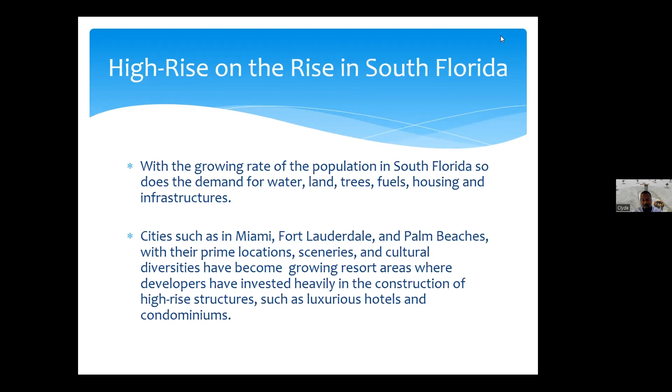One of the challenges they face in these areas is that there's not much undeveloped land, or they have very small spaces and have to redevelop these. Now, how they get around this is by maximizing space with height and depth - very tall towers that go as deep as possible underground.

Another challenge faced is climate. Climate change brings about droughts and floods. Flooding, in most cases, creates a rise in the water table, which brings about the need for dewatering or groundwater control during construction.

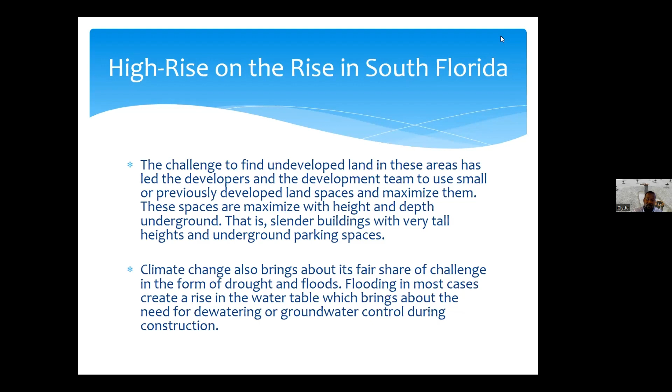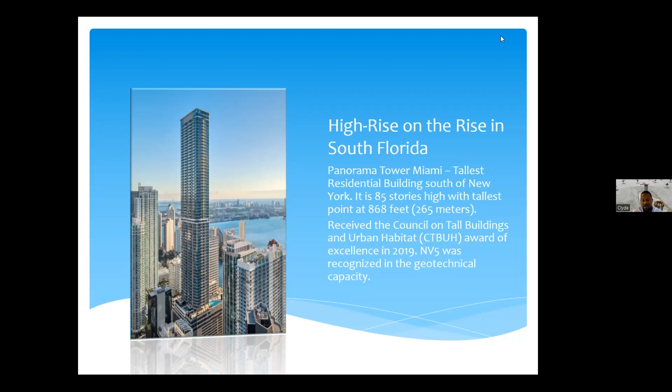Here I just show a quick example of the tallest residential tower that has been constructed south of New York. It is known as Panorama Tower. It is 85 stories high, with the tallest point being 868 feet or 265 meters. In 2019, it received an award of excellence from the Council on Tall Buildings and Urban Habitat. Also in 2019, NV5, the company I work at, was recognized for its geotechnical capacity.

Some engineering challenges that the geotechnical engineer would be required to provide solutions to: these are some of the challenges we face when a tower of a certain height is to be developed. We have to make sure that we have safe and economical foundations to support these structures.

The settlement, that's total and differential settlement, must be acceptable, because if not, it could be very costly for the developer. We have to make sure the settlement impact to adjacent structures is minimal, that vibration from construction of the tower is also minimal at adjacent properties, and that excavation and ground movement at adjacent structures are properly taken care of.

Basement construction itself is another problem, because in South Florida the water table is pretty high. Within the first 2 feet of digging, that's pretty much the water table here. So you can imagine digging 10, 15, or even 30 feet underground, the volume of water you have to deal with. There are so many stringent regulations when it comes to dewatering a site, where the DEP, the Department of Environmental Protection, has certain limitations on where you can deposit water once you take it from your site. This creates a very problematic situation for towers that need to install basements.

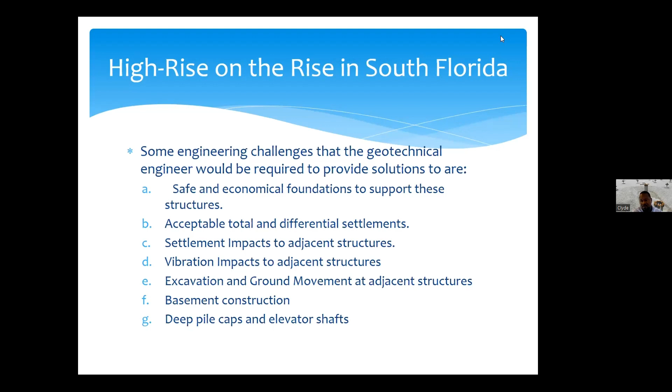Also, deep pile caps and elevator shafts are similar to basement excavation, because they go underground as well.

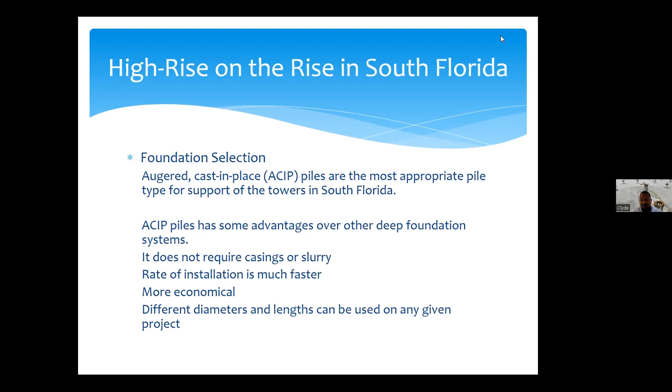So the first thing we do is determine the foundation selection. Auger cast, or continuous flight auger cast, augered cast-in-place piles, is the most appropriate type used in towers in South Florida. Some advantages of these foundations over others: one, they do not require casings or slurry. The rate of installation is much faster, meaning you can install many auger cast piles within a day. It is much more economical, and on any project you can use different diameters and different lengths.

Some of the disadvantages: it's a very messy operation. The spoils have to be properly disposed of, and the reinforcement has to be installed before the grout starts setting. Can you imagine augering down to a depth of 100 feet below grade, and as soon as you get to that depth, you allow that grout to start setting? When you get to put the reinforcement in, it becomes very problematic. So in most cases, you have to abandon that pile, abandon the grout that is there, and reinstall.

The grout intake can also increase depending on the soil type. If we have organic material, the grout intake typically increases. The piles cannot be installed close to one another until the grout has set, so there are certain requirements on how close you can install one pile to the next. And the piles can easily get out of tolerance - if the operator running the machine is not skillful enough, the pile can end up an inch or more out of tolerance.

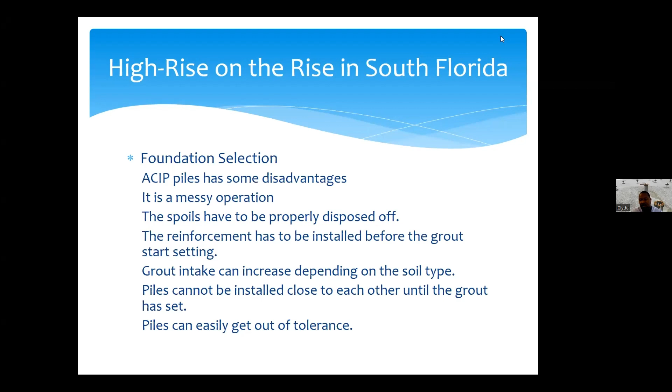One of the benefits of auger cast-in-place piles, which we call ACIP, is that they give you a wide range of diameters to use - from 14 to 36 inches, or 36 to 92 centimeters. You can go from 10 to 200 feet, that's 3 to 60 meters, in length. The capacities on these piles typically range from 80 to 4,200 kips, that's 356 to 18,683 kilonewtons. The tension capacity typically ranges from 45 to 55% of the compression capacity.

Once we determine the compression capacity on these piles, we typically range the tensile capacity as 45 to 55% of that capacity. For lateral capacity, it's typically 0.5 kip per inch of diameter once you're in sand, silty material, or clay. So if the head of your pile is in silty material, clay, or sand, we can use a rule of thumb that the capacity would be 0.5 kip per inch of diameter. For gravel and rock, it's typically 1 to 1.5 kip per inch of diameter. These capacities are typically verified by load tests.

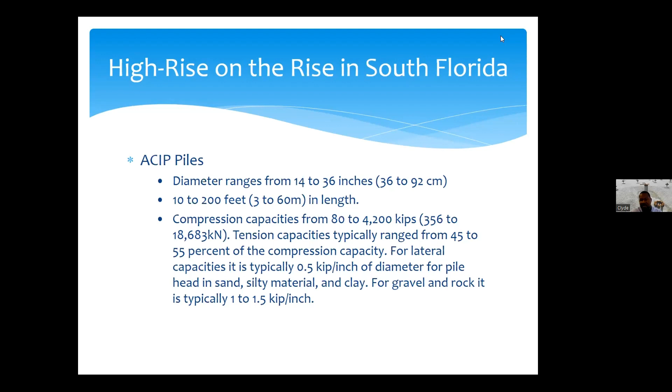One of the reasons why we don't use drill shafts is that they are not typically economically feasible. They are very attractive to carry large loads, but they have a very slow installation rate. A drill shaft could take up to a day or a day and a half to install, while you could install 20 to 30 auger cast piles within that same period of time. So the slow rate of installation doesn't make it feasible for these towers.

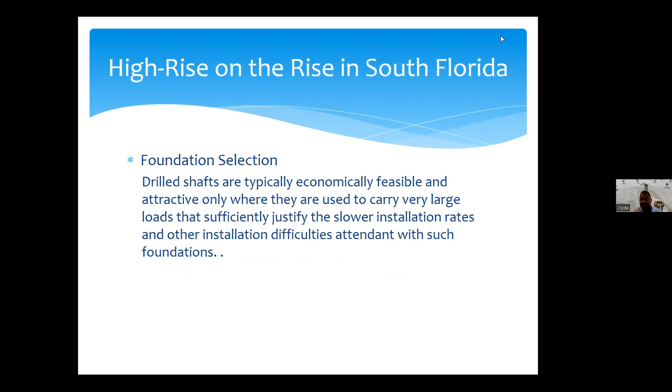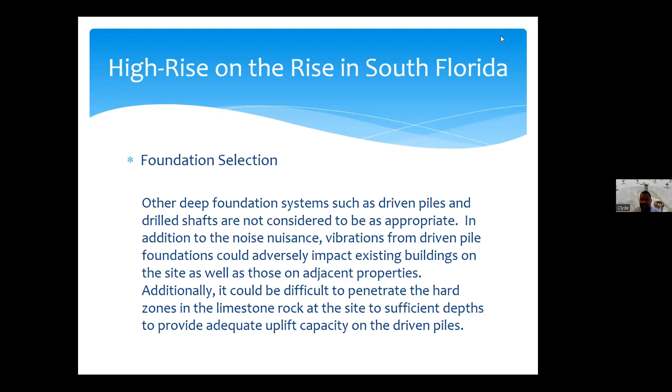Other deep foundations such as driven piles are not considered because of the noise nuisance, since we're installing these towers adjacent to other properties. Once you start driving, the vibratory effect from the driven pile tends to create damage to existing buildings. That vibratory damage can become very costly for the developer, who may end up in lawsuits from property owners for damage caused by construction. Also, the limestone here in Miami can get very hard, making driving these piles difficult and hard to penetrate that deep limestone layer to get adequate uplift capacity.

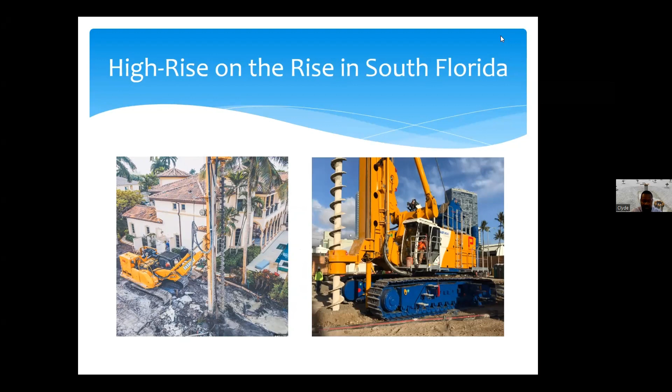After we determine the foundation, the diameter of the auger cast pile, and the length, we perform settlement and lateral analysis. The settlement analysis determines maximum and differential settlement, because those are very critical. We determine settlement using empirical formulas as well as software programs such as Settle 3D or Midas GTS NX. If we want more in-depth finite element analysis, we typically go with Midas GTS NX. This is a time-consuming process, but we do charge good money to create that analysis. We also determine the rate at which settlement dissipates.

You want to know at what rate your settlement dissipates, whether it's 1 in 25 or 1 in 30, so you can determine the settlement at your property boundaries and how it may affect adjacent properties. One thing now implemented here in Miami is that at your property boundaries, you should try to have a maximum of 1 inch of settlement allowance. It's very difficult with these towers going 70, 80, or 90 stories high, but that's one of the rules now in place. This finite element analysis becomes very vital, because we can model different pile lengths and see how settlement dissipates as it propagates toward your property boundaries.

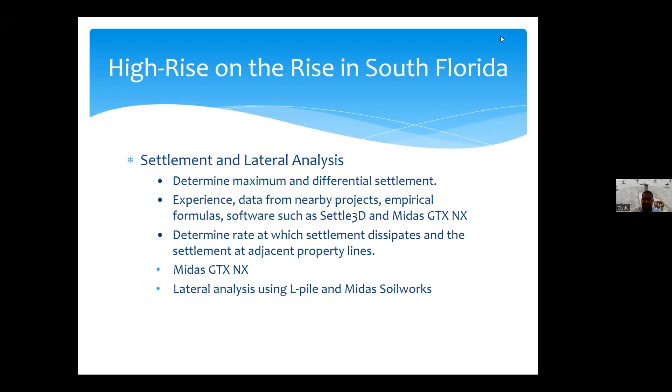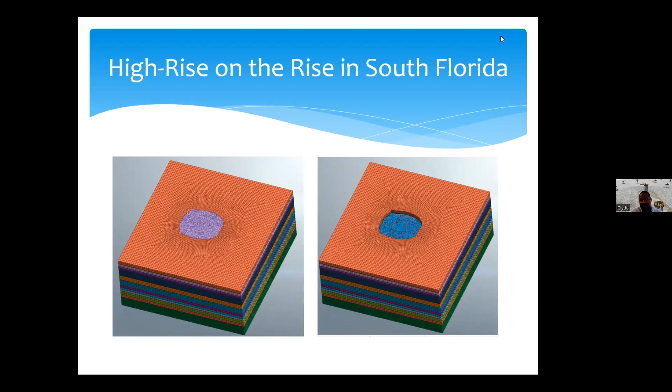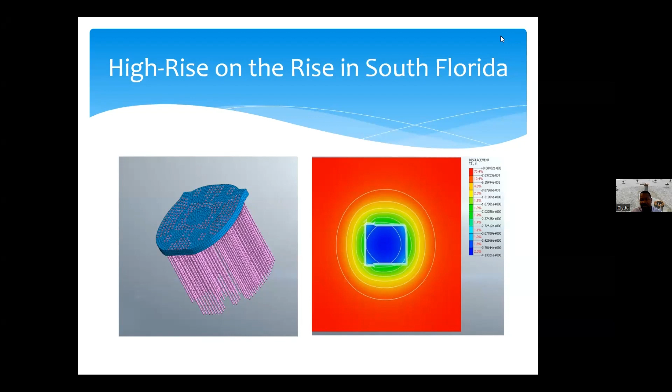Here I'm showing sections of the tower. On the left, I'm showing a mat supported on piles for a tower by the name of Bentley Tower, and on the right, I'm showing the output you get, with contour lines and color codes that match the different settlement at different locations of the tower.

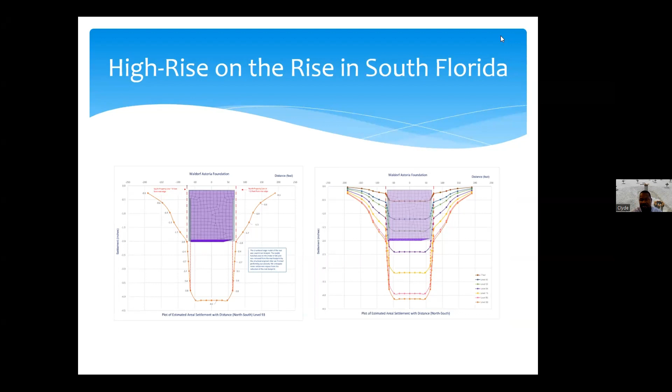What is critical is that we plot the settlement profile as it dissipates away from the tower, so we can see at the border or property line what your settlement is. On the graph, the middle shows the footprint of the tower, and as you look left or right, we show the distance away from the tower and the settlement away from the tower. These are very critical to determine the effect your tower would have on adjacent properties, because once these towers are erected, all property owners get in line, since somebody's going to have a claim for damages to their properties.

Once we've done our settlement analysis as well as our lateral analysis, we finalize our pile size and pile length. Once that is done, we get into testing.

Testing is done in general accordance with ASTM D1143, the compression load test. Depending on the capacity of the piles, we use either a standard top-down, a statnamic, or an APPLE drop hammer test. The statnamic is created like a rocket - you put it on top of the pile, it has gases and gravels inside, you light it, and it explodes like a rocket taking off. That thrust applies a force on top of the pile, and the pile has strain gauges inside that measure the side shear or friction at different depths as the load hits the top.

The same thing is done for the standard top-down test. You apply loads on top of the pile using weights or hydraulic jacks at different pressures correlated to the design load. Strain gauges installed inside the piles measure your side shear, and based on that, you can do value engineering to determine if your pile needs to be extended or shortened based on load dissipation along the shaft.

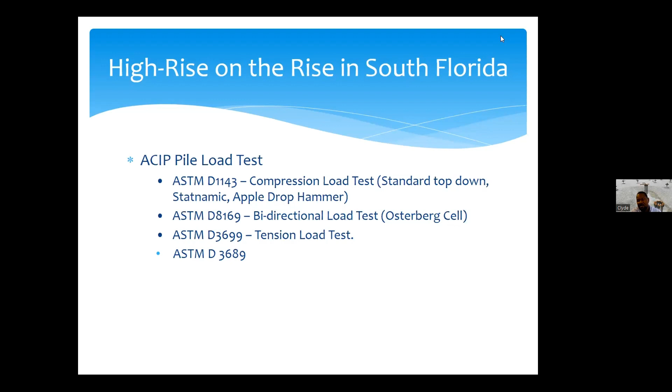Now, after we're finished testing the piles, for any tower that involves a basement, basement construction is a very difficult task. For basement construction, we have to give support to the basement excavation, as well as methods that will facilitate a dry basement excavation during construction.

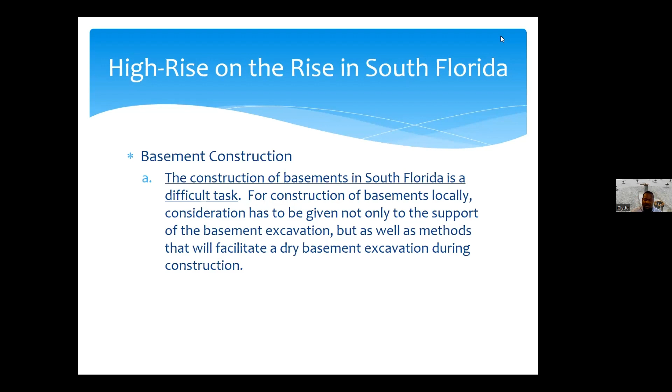One of the basement supports that we typically recommend is sheet piles. Traditionally, sheet piles are used to support excavations. Conventional sheet piles are typically installed using a vibratory hammer to send the piles in place. In loose to medium dense sand, these sheets can be pushed into place.

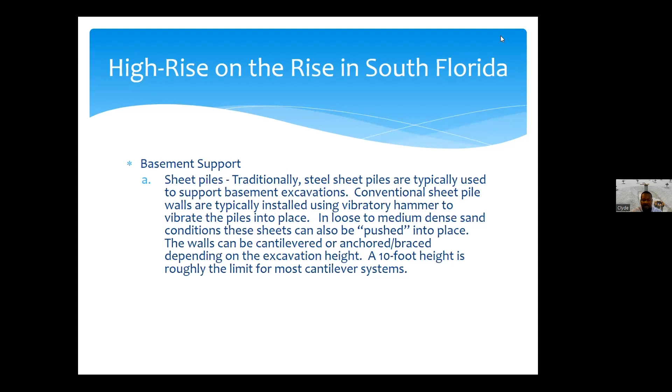The walls for the sheets can be cantilevered, anchored, or braced. In a cantilever system, we recommend a maximum of a 10-foot height. Above that height, we recommend bracing or anchoring these sheets.

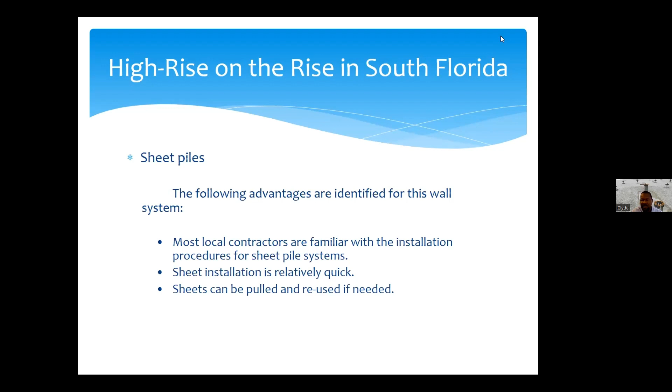Some of the advantages of sheet piles: there are a lot of contractors here in South Florida who are familiar with the installation. It's very quick, and the sheets can be pulled if they are misaligned or if they need to be reused at another location.

Some of the disadvantages: the sheets can get damaged during installation. The vibratory effect from the installation can have a detrimental effect on adjacent properties. The sheets can have leakage or soil washout. And the depth of the sheet has to be considered because it can protrude into the excavation.

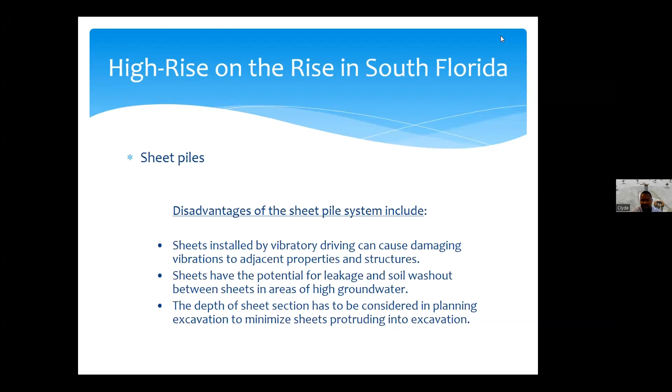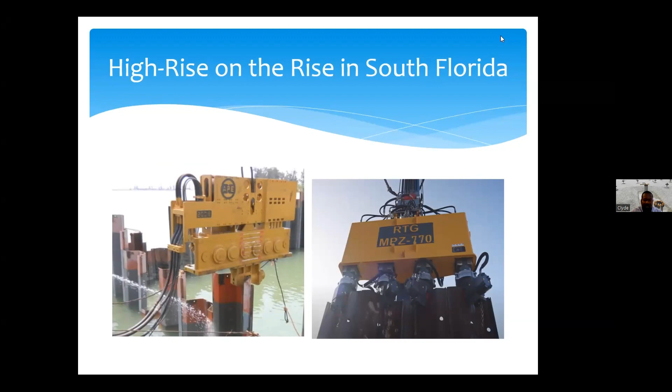Here I'm showing the two types of machines typically used to install the sheets. On the screen on the left would be the vibratory hammer, and on the right would be the pressing hammer. So one does vibratory techniques to install, the other is the pressing technique.

Here I'm showing a complete project where we installed sheets. You can see on the ground those would be your auger cast piles, and on the side that would be your sheet pile wall, used to create support for your excavations. Most times when this is done, they add a water barrier onto these sheets, then put on concrete or shotcrete to create the walls, and that becomes your basement wall.

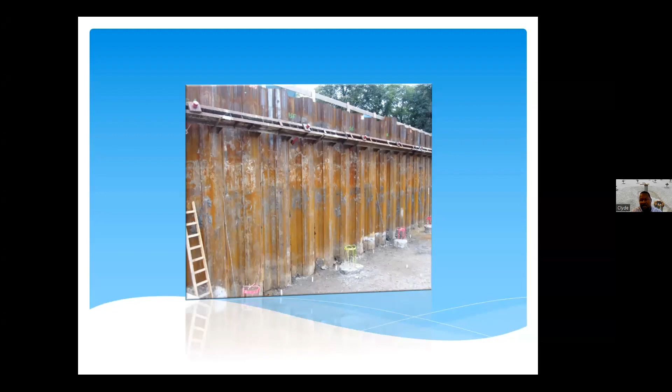Another method is deep mixing, or deep soil mixing, or deep mixing walls. Deep mixing has gained popularity in basement excavation in South Florida. This procedure typically uses large diameter paddles to blend a lean grout mix with in-situ materials to create a column of cemented material with unconfined compressive strengths on the order of 300 to 500 pounds per square inch, or 2 MPa to 3.5 MPa. The mixed columns can be reinforced with steel sections added for excavation support.

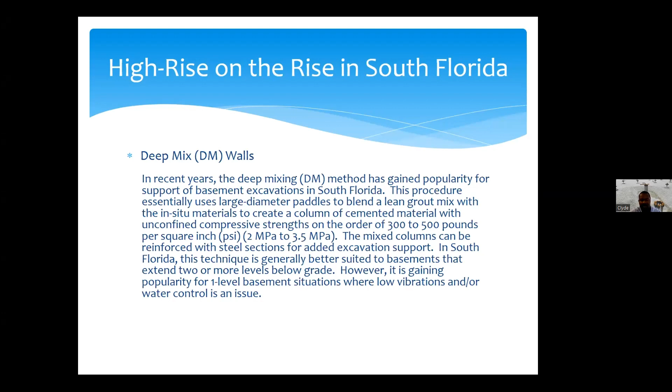This technique is typically used for 2 or more levels of basement below grade. However, due to the very high water table in South Florida and the closeness to adjacent properties, because of vibration and water control, it is now being used more regularly on 1-level basement excavations.

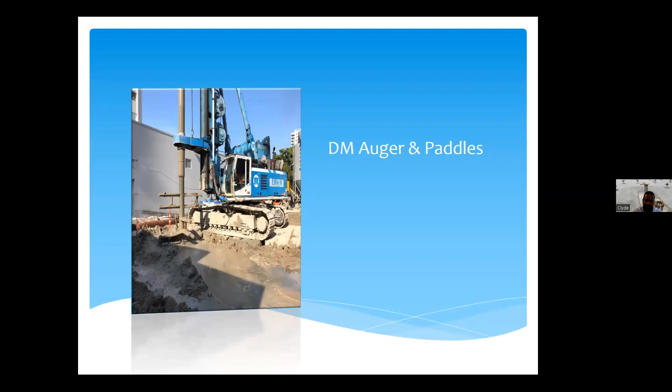Here I'm showing the deep mix auger and the paddles that are used to create that deep mix wall. Here is an operation where that deep mixing operation is taking place.

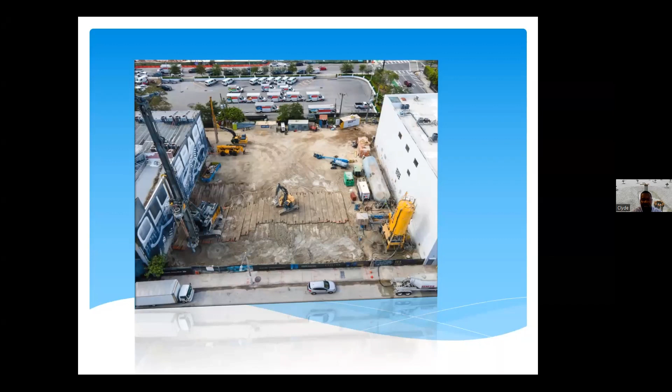So the advantage of this method is it's practically vibration free, so it doesn't create any vibration as the sheet pile does. It is well suited for subsurface conditions where the soil is to be mixed, or sand, or weakly cemented limestone. If it's a silty site, then this process typically doesn't work very well in silty materials.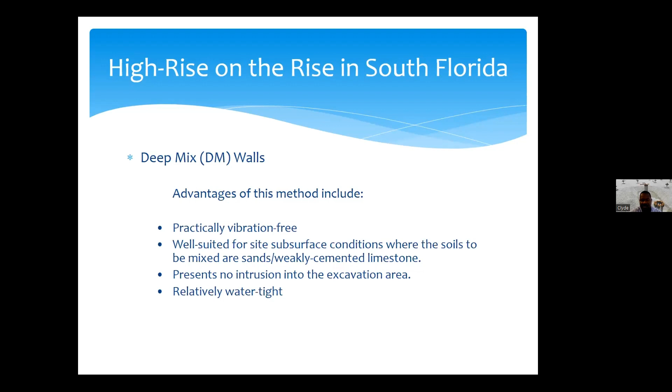It presents no intrusion into the excavation. So once you finish, you cut that wall directly at whatever spacing you require, and it's relatively watertight. Once it is finished, you have very minimal water leakage.

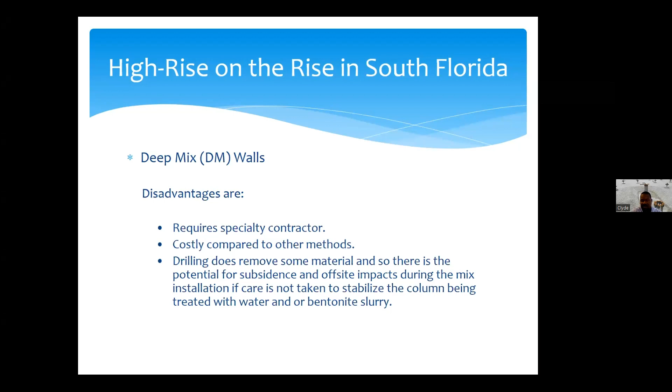The disadvantage is it requires a specialty contractor. Locally, there are only 2 companies carrying out this operation, 2 companies that are specialty contractors in doing the DM walls. It is very costly compared to other methods, and the drilling does remove some materials, so there is a potential for subsidence and offsite impacts during the mix installation. Care has to be taken to stabilize the column being treated, so sometimes they treat it with water or bentonite slurry.

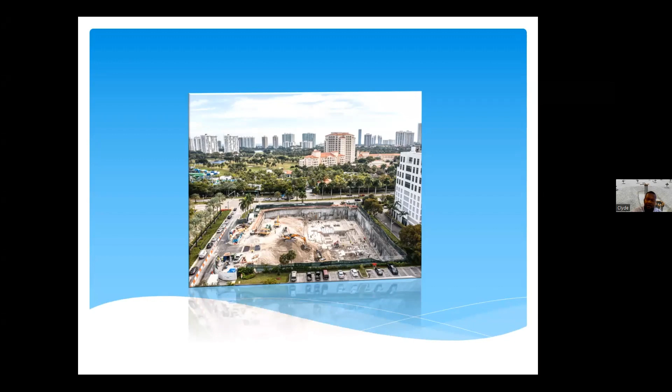So that's another aerial view looking at that 3-level basement. And this is looking at the basement wall. So that's how the walls look once you finish your DM mixing and cut into that basement excavation.

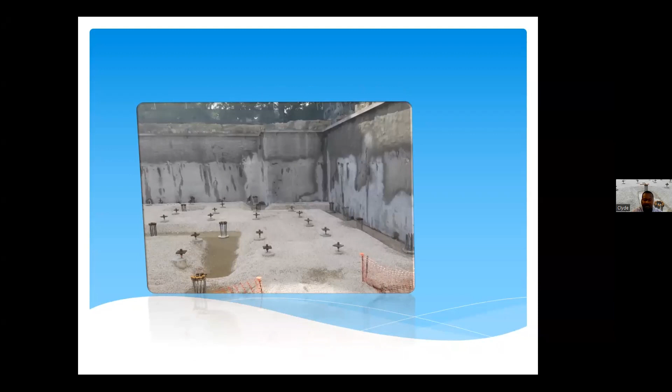Another system that we typically recommend or use is tangent and secant pile wall. So the same auger cast piles that we use, we create tangent and secant pile wall using the same machine on the site. An advantage is it's practically vibration free. Large heavily reinforced sections can be installed if needed, depending on the level of reinforcement or stabilization that you need. So in case we want to use these same piles to be bearing for foundation, we can utilize them both as an excavation support and as a foundation member.

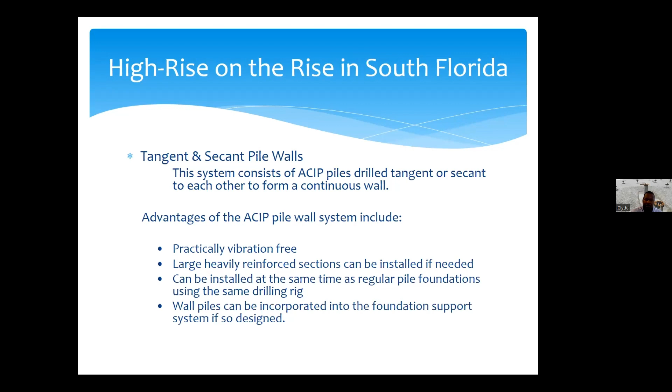Some of the disadvantages: water tightness can be an issue. If they are not locked in properly, you can have water intrusion between the two. The pile diameter has to be considered because it can protrude into the excavation. Although installation of the piles can be achieved fairly quickly, you are restricted by how close you can install piles against each other, so this could become a timely installation.

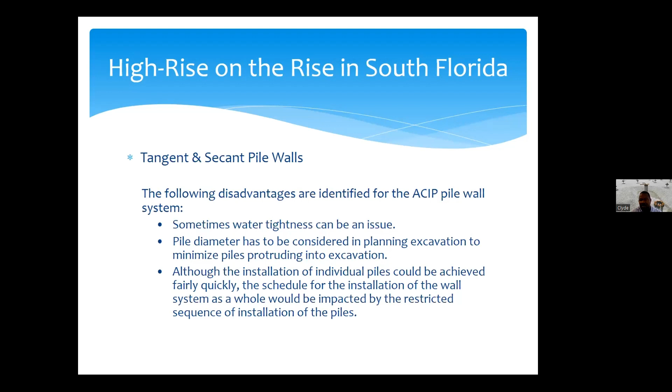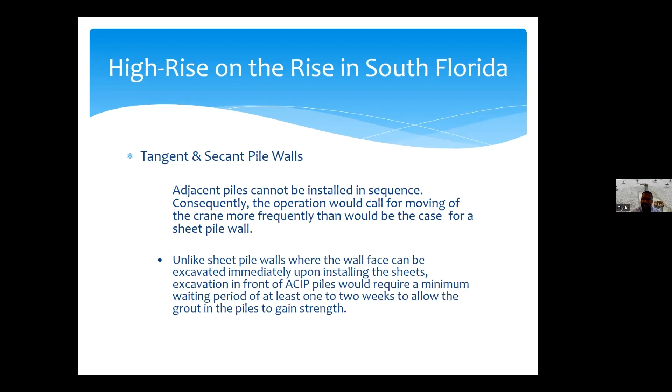As explained, unlike sheet pile wall, where the face of the wall can be excavated immediately, once you do the tangent and secant pile wall, you typically have to wait 2 weeks or more to allow the grout to gain strength before you can do any excavation. Because if the grout doesn't properly gain that strength and you start excavating, you may start cutting into the grout and damage the entire process, having to go all over again, which becomes a very costly process.

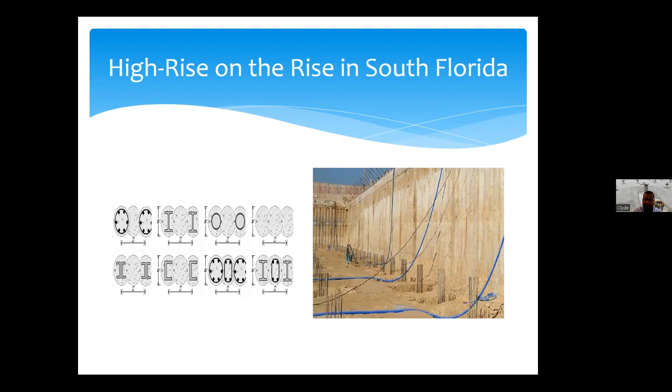So here I'm showing a schematic on the left-hand side of how a typical secant pile wall is done. And on the right, I'm showing a section on a project of a secant pile wall excavation support. That's another section of the secant pile wall.

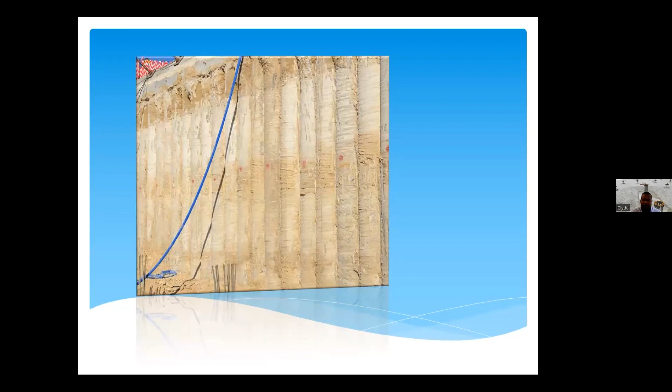Another method of support we typically recommend is slurry wall panels. Slurry wall panels are dug from existing grade and filled with bentonite slurry. Once the final depth is reached, rebar cages are dropped into the slurry and concrete is placed via tremie to displace the slurry. This method, like the DSM, is also better suited to deeper basements. Slurry walls can be incorporated into the foundation design as load-bearing elements.

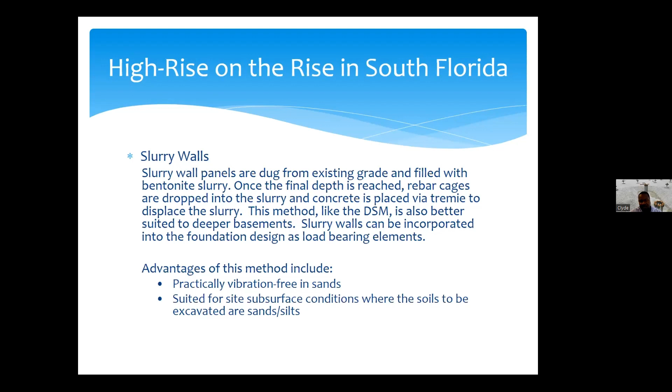The slurry wall is similar to the secant pile wall; however, the process is a little bit different. The machines are different, the equipment is different, and the installation process is different. The advantage of this system is it's practically vibration-free in sands, because once you start cutting into rock, it creates vibration, and the vibratory effect can affect your adjacent property. It is suited for subsurface conditions where the soil to be excavated is sand or silt.

Some disadvantages: it requires a specialty contractor. It is very costly compared to other more conventional methods. The walls can leak, and during excavation, the panel does remove material, and there is a potential for subsidence and offsite impact during mix installation. So again, care has to be taken while doing this process.

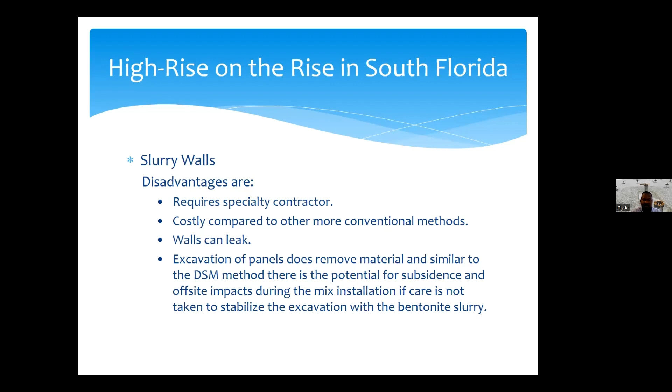Here on the left, I'm showing the machine that is used for your slurry wall, and on the right, a schematic of how it's done. Once the machine cuts that depth, the slurry is placed to keep the walls intact, and the machine rises to the surface. Once it rises to the surface, concrete is placed via tremie into the hole, and because the concrete is heavier, it displaces the slurry, which rises to the top as the hole is being filled with concrete. Once concrete gets to the surface and you see clean grout flowing, your reinforcement is typically installed.

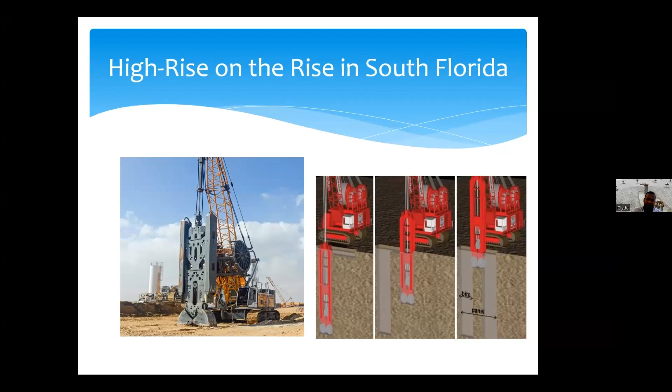Another method which has been done only once is soil freezing. Soil freezing is a technique where very low temperature, vertical refrigerant-filled tubes are introduced into the ground to freeze the soil. This technique is very costly, time consuming, and has found very limited use locally. The reason is it's very expensive and time consuming because the project we did it on was Brickell Citi Center, and it took almost 6 months for that water to properly freeze in the section where they did that test.

So many developers and contractors stay away from this because 6 months of waiting would kill pretty much their project, because with these developers, it's a get-in, get-out approach. They want to get in today, and in 6 months to a year, they are getting out with their profits.

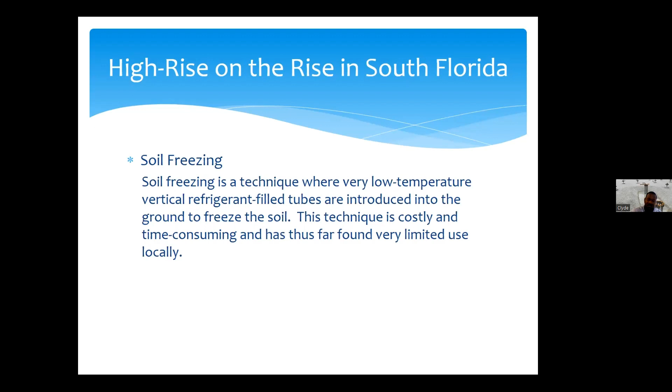After we finish the pile selection, the pile testing, and the basement construction, we typically assess settlement impacts, excavation and ground movement impacts, as well as vibration impacts. These are key components that we take into consideration with all of these towers.

Attorneys are very vital in these projects. Every adjacent neighbor has an attorney lined up waiting on something to happen. So we make sure these key components are properly addressed during the design phases.

For settlement impacts, we have settlement monitors on adjacent structures, and there's a benchmark we typically use. Any adjacent structure within 100 feet from the footprint of the tower is typically monitored, or if it's within a 300 feet radius from the center of the tower, those adjacent structures are monitored for settlement impact.

For excavation and ground movement, any excavation close to your adjacent property, you want to find out what the adjacent structure is like. If it's a building supported on shallow foundation or a slab on grade, you want to do mitigation. This typically includes underpinning of these members using permeation grouting or chemical grouting to create stable support, so that during excavation the supporting soil is not undermined and damage isn't created to these buildings.

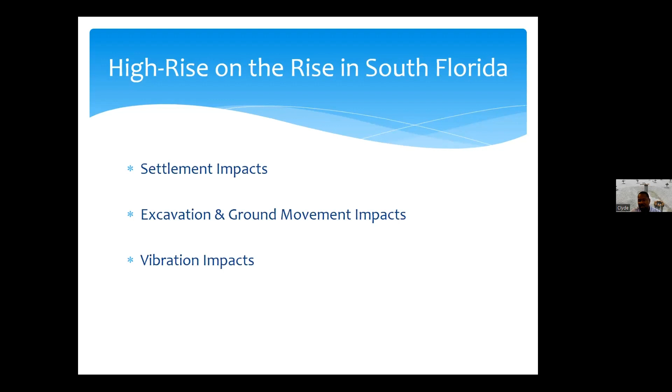That notification could be an email or text message saying, based on the work you're doing, you've achieved 0.4. At 0.4, we have different requirements in place. As soon as you hit certain values, these are the measures you have to take to ensure no damage to the adjacent structures.

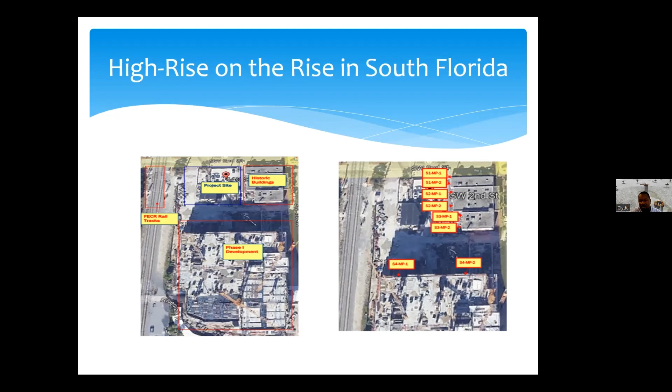To the right, we tell the contractor or developer here are the locations where we want settlement monitors placed, and here are the locations for vibratory monitors. At these locations, you'll have special equipment with electronic recordings - either real-time data to your phone or computer, or data taken weekly as in the case of settlement, and transferred to you so you can make necessary recommendations if needed.

Here we have Table 1, showing a typical protocol for settlement. At 0.1 inch, we continue taking readings as planned. From 0.1 to 0.25, you increase reading frequency and monitor buildings for any sign of distress. Once your settlement exceeds or falls within these ranges, you start looking at these actions.

Once it gets above 0.25, you need to stop working. You now have to modify your means and methods of construction because you're exceeding the threshold level of settlement on the adjacent property. It's similar for your vibration monitoring - you have the event description, and once it gets into that range, you have an action plan for how to mitigate the vibratory effects happening at your site.

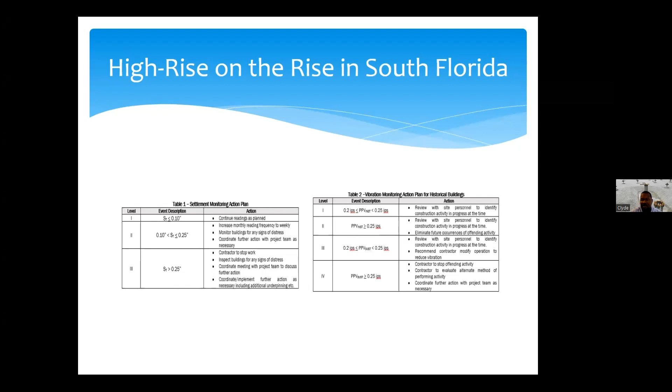Once you start doing this, you'll realize how critical these plans are, because they allow you to properly monitor your construction, limit any distress your construction may cause to adjacent properties, and limit any payout you may have to make later on in case of damages to adjacent properties.

Here I'm just showing a few of the projects that I've worked on that are 30 levels and above.

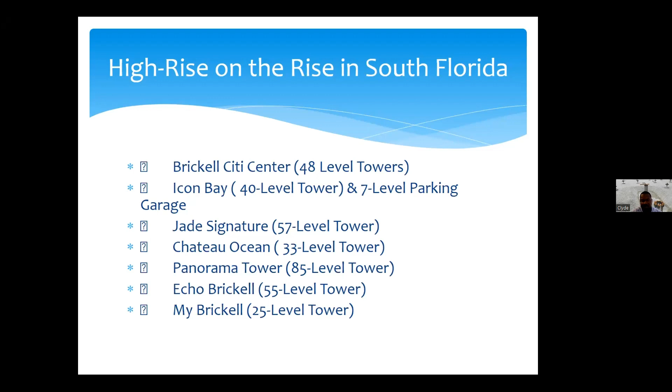So we have Brickell Citi Center, 48 levels, Icon Bay, 40 levels, Jade Signature, 57, Chateau Ocean, 33, Panorama Tower, 85, Echo Brickell, 55, My Brickell, 25, Waldorf Astoria, which is the new thing coming to town, 90 levels, E11even phase 1 and phase 2, 63 levels apiece, Aria Development, twin 60 level towers, Aston Martin, 53 levels, Square Station, 33, Bentley Towers, 64, Baccarat Tower, 74. And these are just a few.

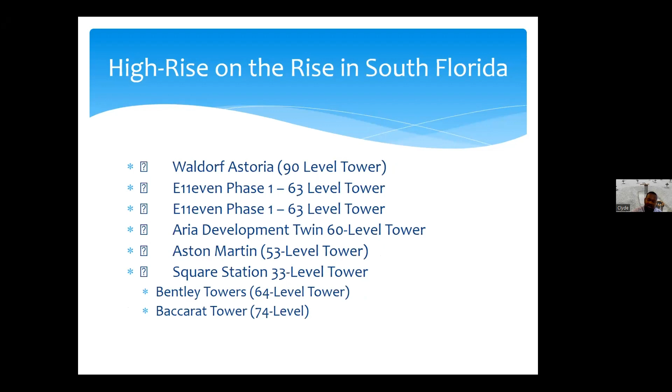Satellites monitoring the tilting, so we're doing tilt monitoring on these buildings. What the satellite is doing is giving us readings today and comparing that reading with one year ago. So March 9, 2022 is being compared to March 9, 2023. It does that on a daily basis, taking a reading and comparing the tilting of that building today to what it was one year ago, so we'll have an idea of any detrimental effect our construction may be having on the building. This is my presentation.